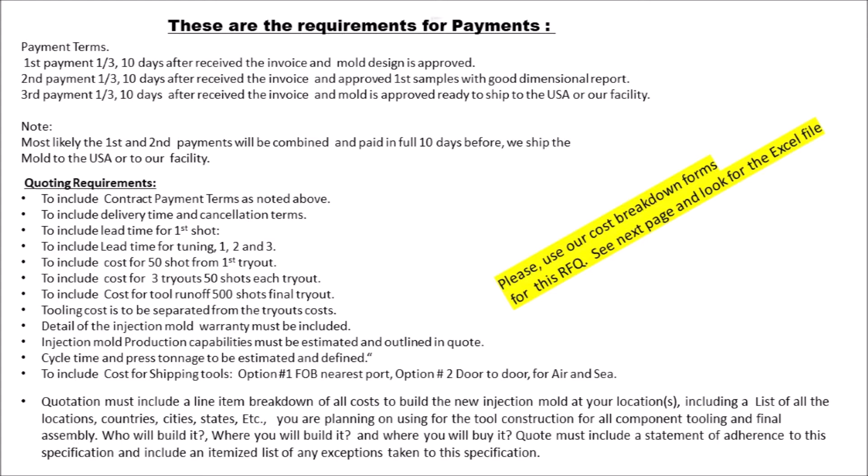Quote must include a statement of adherence to this specification and include an itemized list of any exceptions taken to this specification. This RFQ is for one fully automatic custom-built production mold. The mold must be designed and constructed per Al Amer mold requirements and as detailed below. Precision molding and mold construction are required for this tool. The surface finish for cavities and cores, SPI B1.

Part 3D CAD file name, 105C. Part 2D file name, D105C. Tonnage, mold must fit in Engel 85-ton press. Please approximate the required tonnage for each option. Cycle time, less than 36 seconds. Approximate part size, CAD. Wall thickness, CAD. Mold base, see next page.

Molded material, PA66. Estimated annual volume, 250,000 parts, mold life, 5 years or 1,250,000 shots. See next page for cavitation. Mold type SPI 101 mold. Cycles, exceeding 1 million. Description, high production mold. The molded parts require tight tolerances. Mold shall be built to produce 1.5 CPK quality parts.

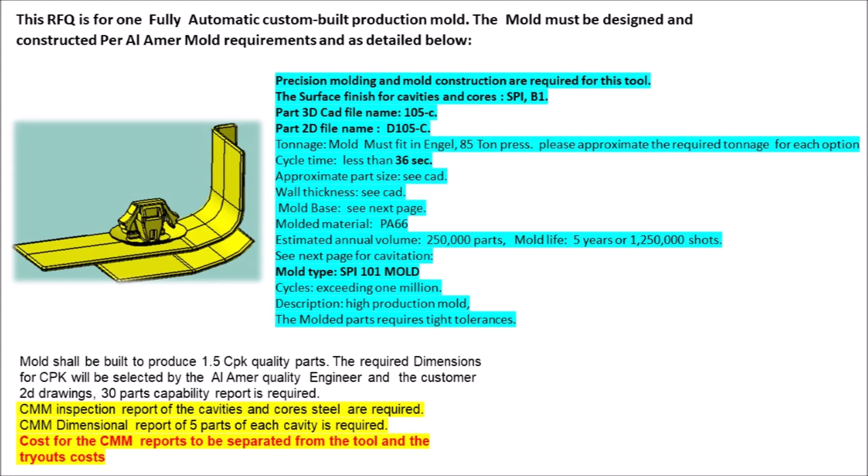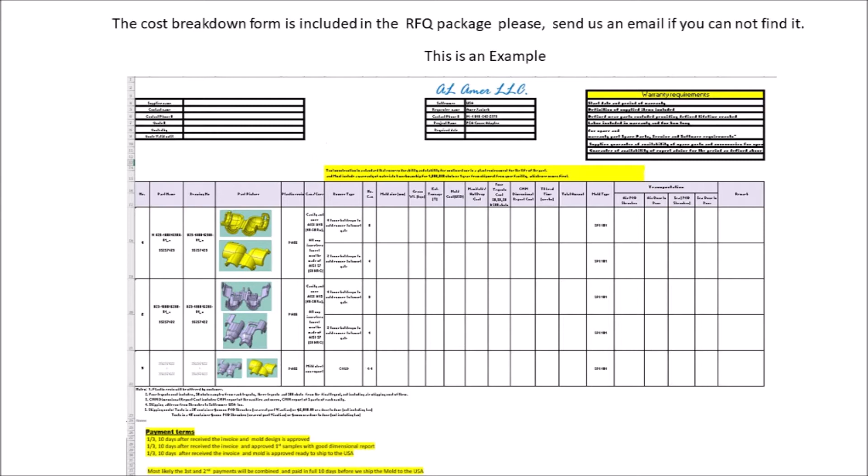The required dimensions. for CPK will be selected by the Al Amer quality engineer and the customer. 2D drawings, 30 parts capability report is required. CMM inspection report of the cavities and core steel is required. CMM dimensional report of 5 parts of each cavity is required. Cost for the CMM reports to be separated from the tool and the tryouts cost. The cost breakdown form is included in the RFQ package. Please send us an email if you cannot find it.

This is an example. Please quote these two options. Option number 1. Mold cavitation, 4 cavities, production tool with cavity and core inserts, fully automatic. Fill system for option number 1. 2 hot drops, Incoe hot runner system. To cold runner, to tunnel gate.

Option number 2. Mold cavitation, 2 cavities, production tool with cavity and core inserts, fully automatic. Fill system for option number 2. 1 hot drop, Incoe hot runner system. To cold runner, to tunnel gate.

Steel type for the cavity and core inserts for options 1 and 2: AISI H13, 48 to 50 RC. All sub-inserts must be made of mold quality AISI S7, 58 HRC. The supplier must use Finkl steel for both options. Mold base for both options, DME number 2 or equivalent.

Mold type SPI 101 mold. Cycles, exceeding 1 million. Description, high production mold. For molded parts requiring tight tolerances. For this RFQ the supplier must provide: 1, DFM and dimensional feasibility reports. 2, approximate tonnage.

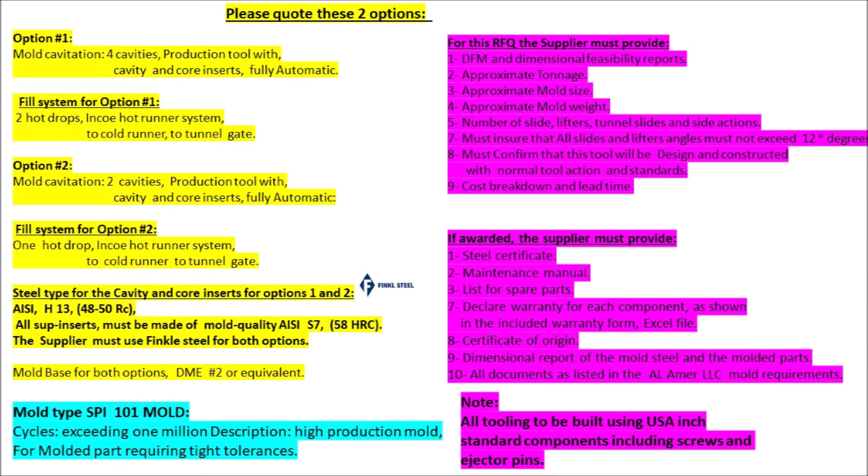Note: all tooling to be built using USA Inch standard components, including screws and ejector pins; those are the approved suppliers for the Finkl steel in China. Tuning of the mold: these tool modifications are not engineering changes, but are considered part of the tool build process to comply with fit and dimensional requirements. The supplier is responsible for the cost.

The mold supplier must ensure all molded parts are within the required dimensional tolerances as shown on the 2D drawing. The mold supplier must use fine precision steel tolerances for the mold construction. See the 2D drawing PDF file I have included in this RFQ. The molded part 3D data is master.

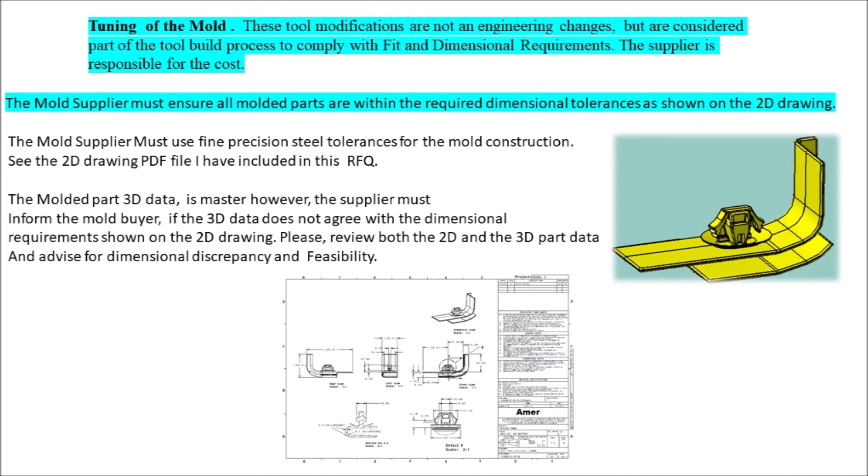However, the supplier must inform the mold buyer if the 3D data does not agree with the dimensional requirements shown on the 2D drawing. Please review both the 2D and the 3D part data and advise for dimensional discrepancy and feasibility.

Runners and gating. Full round runners are preferred. If not possible, a modified trapezoidal runner is acceptable. Sharp corners are to be avoided. Radius all corners to the diameter of the runner. Runners to be polished to an SPI number 3 finish without cutter marks. The gate type, number, and location will be agreed upon during design reviews. Where possible, runners are to be stamped with resin identification, i.e. ABS, PC and ABS, PP66.

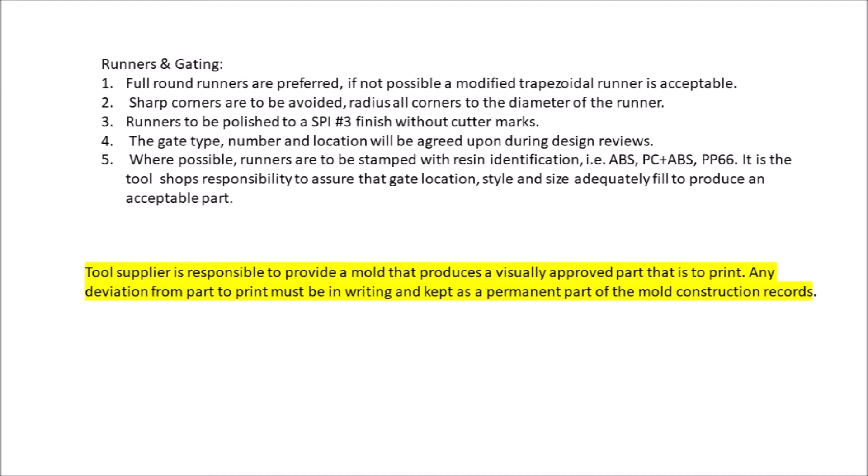It is the tool shop's responsibility to assure that gate location, style, and size adequately fill to produce an acceptable part. The mold supplier is responsible to provide a mold that produces a visually approved part that is to print. Any deviation from part to print must be in writing and kept as a permanent part of the mold construction records. The tool builder must use the plastic resin manufacturer process parameters for all the tryouts.

All molding process temperatures must stay below the maximum temperatures set by the plastic resin manufacturers. The tool builder must make sure the hot runner system is wired per the hot runner manufacturer electrical diagram. The tool builder must not use like steels on details that wear against each other, and typically observe the rule of having 10 points RC hardness difference, as well as using good shutoff angles.

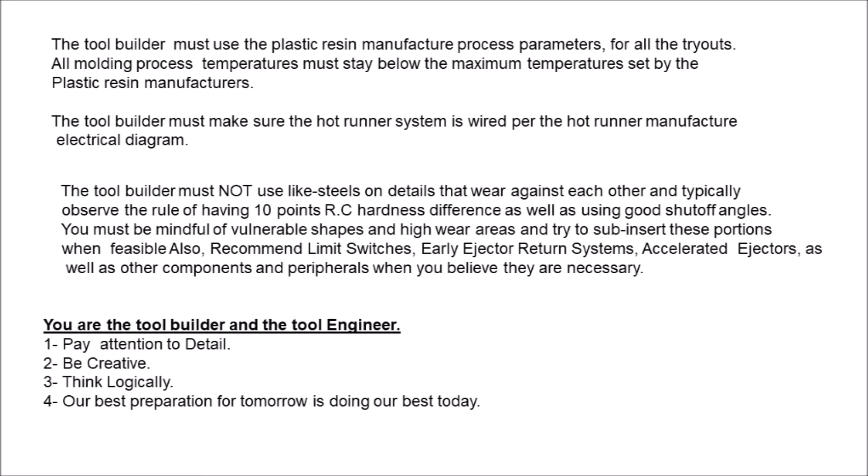You must be mindful of vulnerable shapes and high wear areas and try to sub-insert these portions when feasible. Also, recommend limit switches, early ejector return systems, accelerated ejectors, as well as other components and peripherals when you believe they are necessary. You are the tool builder and the tool engineer. 1. Pay attention to details. 2. Be creative. 3. Think logically. 4. Our best preparation for tomorrow is doing our best today.

Workmanship. Tool construction to a standard that ensures durability and stability for continued use in a plant environment for the life of the part, and must include a warranty of materials and workmanship for 100,000 shots or 1 year from shipment from your facility, whichever comes first.

Responsibility. The tool supplier is 100% responsible for the fit and function of this injection mold, and the Al Amer team will not approve the tool for full payment until after the tool is 100% production ready. If you deviate from the purchase order, you must inform the Al Amer purchasing department immediately of any differences. Tools shall not be built or modified to a level beyond which a written purchase order exists and defines.

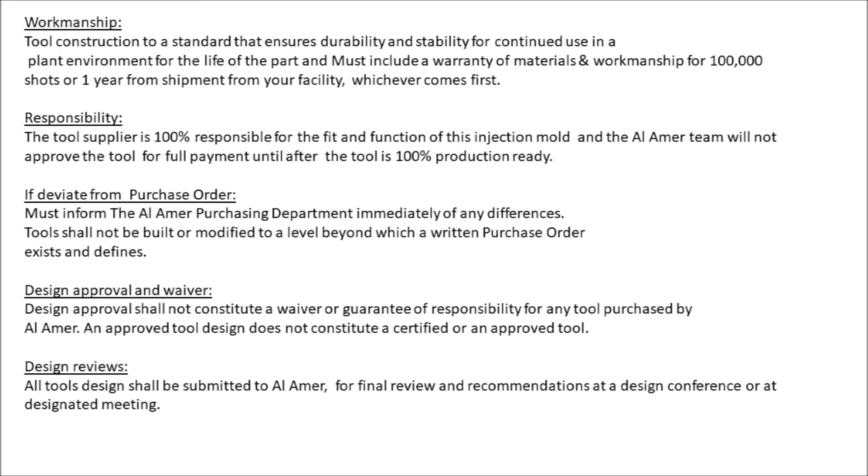Design approval and waiver. Design approval shall not constitute a waiver or guarantee of responsibility for any tool purchased by Al Amer. An approved tool design does not constitute a certified or an approved tool. Design reviews. All tool designs shall be submitted to Al Amer for final review and recommendations at a design conference or at a designated meeting.

Documentation and drawings. All designs are the property of Al Amer. Detailed tool designs are required. Each submission of the tool designs to be accompanied with STEP, PDF and DWG files. A final copy of the tool designs and drawings to be supplied on or before you ship the tool to the Al Amer facility. These are the required formats: native 3D and 2D files, STEP, PDF, and DWG files. 2D full design is not mandatory unless otherwise specified. When 2D full gauge design is required, a copy of PDF, native, and DWG files shall be submitted.

Bill of material is required. Alternatives: as a part of this quotation, you are encouraged to offer alternative part designs to achieve better injection mold parting line shutoffs, part design DFM, part quality, and cycle time reductions to our specified request, especially those that include off-the-shelf components or industry standards, but still fulfill the required function.

Tool designs and purchased components. The responsible tooling engineer, representative of Al Amer, shall review the tool designs, providing recommendations and comments as required. All tool designs shall be submitted to Al Amer for review and recommendation at a design conference or at a designated meeting. Supplier shall not buy tool steel or components until after the tool design is approved by the Al Amer tool engineer.

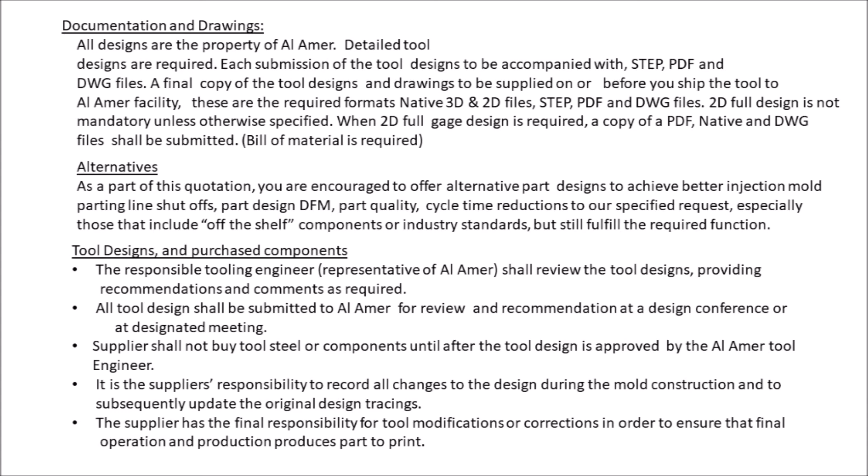It is the supplier's responsibility to record all changes to the design during the mold construction and to subsequently update the original design tracings. The supplier has the final responsibility for tool modifications or corrections in order to ensure that final operation and production produces part to print.

Timeline and open issues. The tool source must submit a tool timing chart, showing detailed timing for each milestone event of the design and build process, within 1 week of receipt of the purchase order. This timing chart must be updated and submitted to the Al Amer tool engineer weekly, and must contain at a minimum start date, duration, completion date, name of the responsible person for each task, date received PO, kick-off meeting, tool design concept review, tool design review.

Final tool design review, buy tool steel and components, tool construction, material from Al Amer to your facility for the first tryout, date for the first tryout and the final tool run off at your facility. Weekly updates must include open issues, pictures and/or CAD files and drawings. Documentation of all events relevant to program timing.

All engineering changes are to be documented by the revision level and date. Any change in delivery, with explanation of change, must be authorized in writing by the Al Amer team. Important reminder that due dates in contracts and timelines are not arbitrary and must be taken seriously. A failure to meet due dates will result in late fees and finance charges.

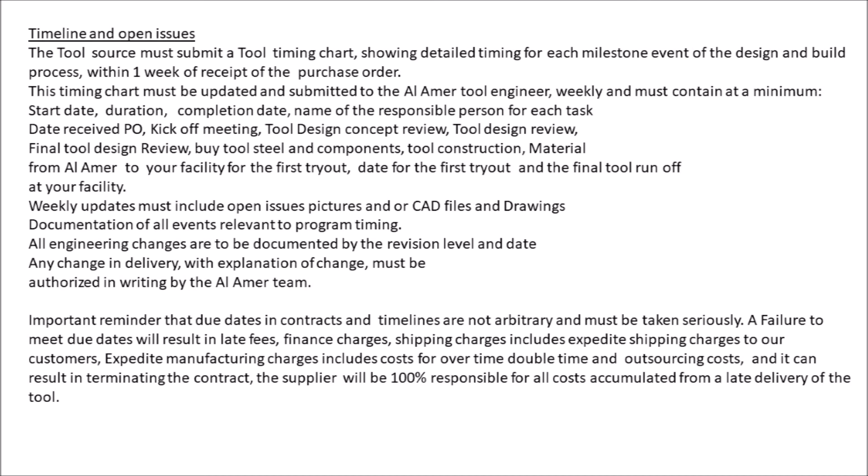Shipping charges include expedite shipping charges to our customers. Expedite manufacturing charges include costs for overtime, double time and outsourcing costs, and it can result in terminating the contract. The supplier will be 100% responsible for all costs accumulated from a late delivery of the tool.

Supervision and inspection. The Al Amer tool engineer and his team reserve the right to visit the tool source at reasonable times and frequencies to inspect the tool and/or tool design during design and build phases, review status of the tool and progress made towards completion, ensure compliance with the requirements of this document, and attend tool tryouts. All changes must be authorized in writing by the responsible Al Amer tool engineer.

Warranty requirements. Start date and period of warranty. Definition of supplied items included. Defined wear parts excluded providing defined lifetime reached. Labor included in warranty and for how long. Shipping and handling costs under warranty. Non-wear parts replaced to have separate warranty period, fixed price for spare and warranty parts.

Spare parts, service, and software requirements. Supplier guarantee of availability of spare parts and accessories for a specified number of years. Guarantee of availability of expert advice for the period as defined above. Customer service personnel supplied must speak English and the local language. See our warranty document, Excel file, included in the RFQ.

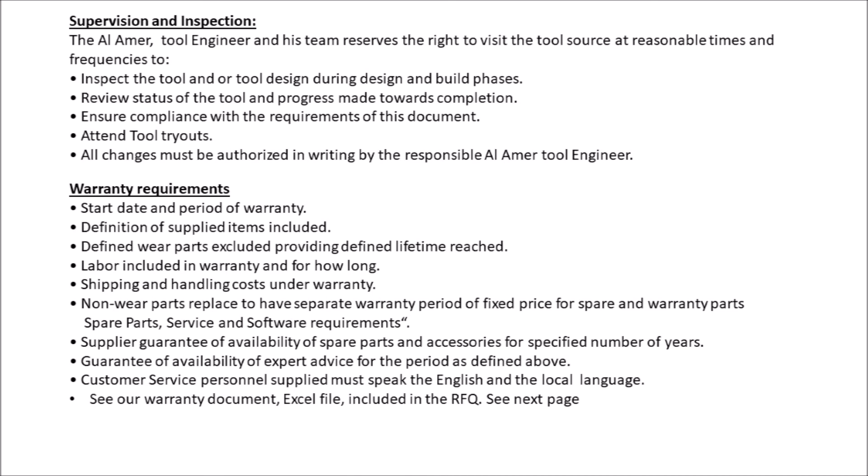See next page. The cost and the lead time for components listed in this document will remain the same until after the component has reached its life expectancy as approved in this document. All freight, shipping and handling charges to and from mold builder shall be initially paid by the mold buyer. If determined to be a warranty repair, mold builder will reimburse such charges to the mold buyer. Components that are 100% warranted, the supplier will replace free of charge.

The bill of material must include the following: part number, part name, catalog number, manufacturer name, supplier name, quantity, stock dimensions, life expectancy, warranty yes or no, warranty start date, warranty end date, components cost, lead time.

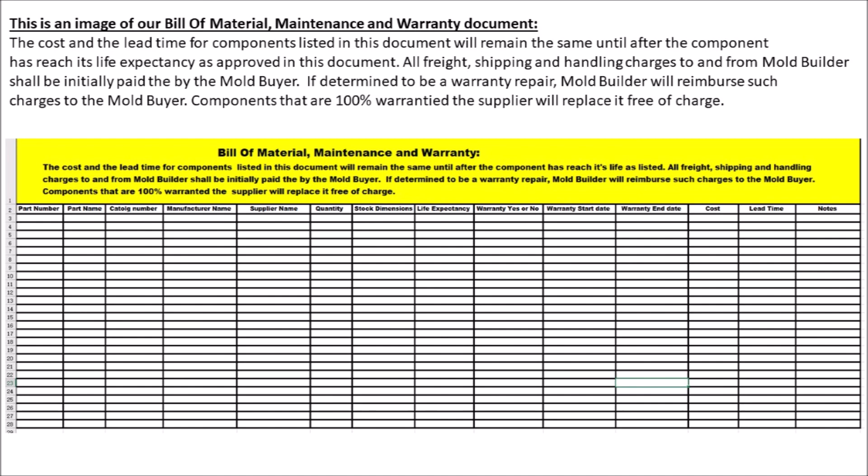Notes: all mold components are to be standard off-the-shelf components purchased preferably from DME. Custom-made items such as sprue bushings and locating rings are not permitted. The tool shop will need to get written approval if custom components are required.

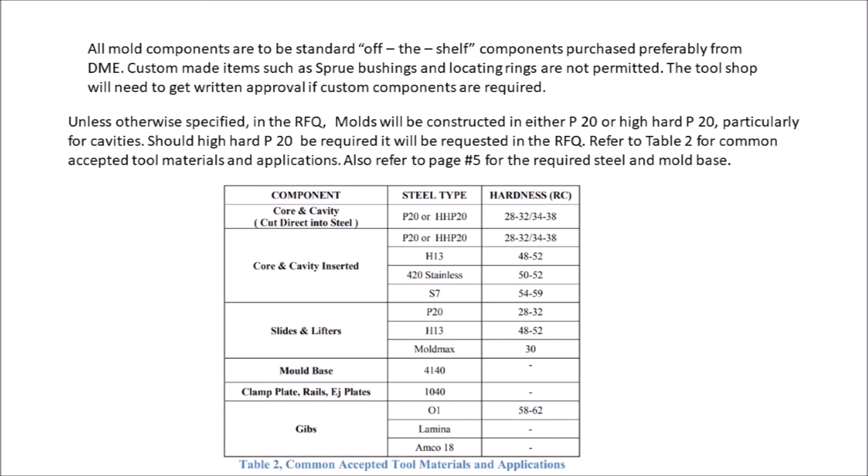Unless otherwise specified in the RFQ, molds will be constructed in either P20 or high-hard P20, particularly for cavities. Should high-hard P20 be required, it will be requested in the RFQ. Refer to Table 2 for common accepted tool materials and applications. Also refer to page number 5 for the required steel and mold base.